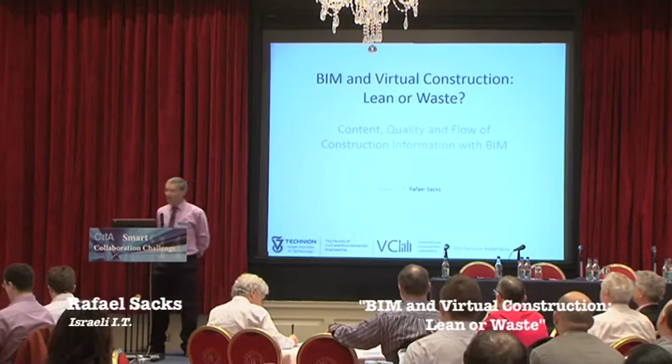I'm not an architect, but a civil engineer, structural engineer by training and construction management by research and practice for years. So I'm going to talk about a lot more practical issues of building modeling, and in particular about the flow of information and how much the flow of information affects the way that people work on site and in contracting in general.

Perhaps just by way of quick introduction, we have a virtual construction lab where we do a certain amount of virtual reality work, but really when I say virtual construction in terms of research, it's that we're trying to research phenomena that happen in construction in the lab, not necessarily with virtual reality. Our two foci are lean construction and building modeling, and the synergies between those. We have a wide range of work and techniques in the lean construction world, and the same in building information modeling, and a lot of technology too.

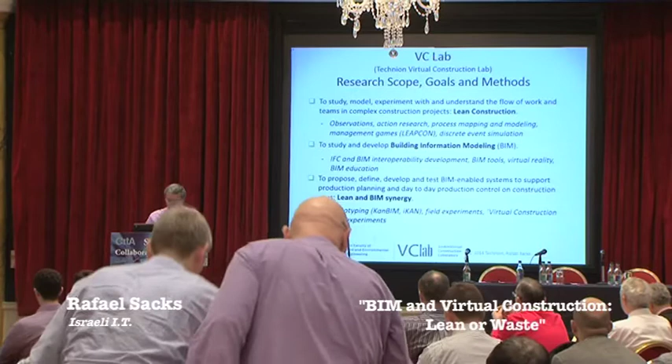But really, we've been putting a lot of effort in the last number of years into building prototypes for systems and then running field experiments and virtual experiments to try to sense what the impacts of information flows on construction sites will be.

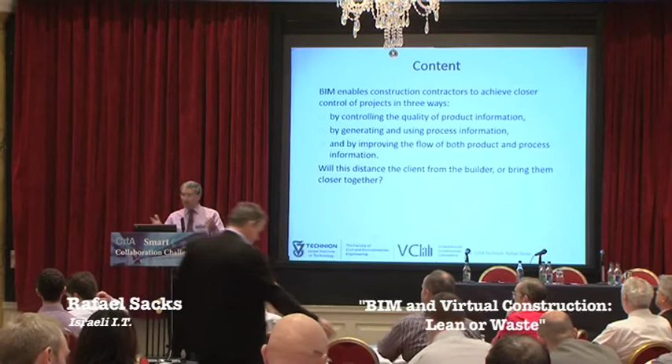So I'd like to address it in these three aspects: the product information, the information about the building; the process information, the information about what's happening, who is there, who is not there, where materials are, what's happening in the supply chains; and then to talk about how we can improve the flow of both of those on site to make things better. And the real question we want to ask is, will this distance the client from the builder or bring them closer together?

When I say client here, even the clients, of course, are a number of levels deep. So if we think about this simple situation where John Smith goes to build his house, and it's a simple job, and he has a builder, and the two communicate very directly. Where do you want the light switch? Oh, I'd like it here, and the builder or the electrician puts it there. The communication is direct, immediate, short-term, and presumably has fewer errors.

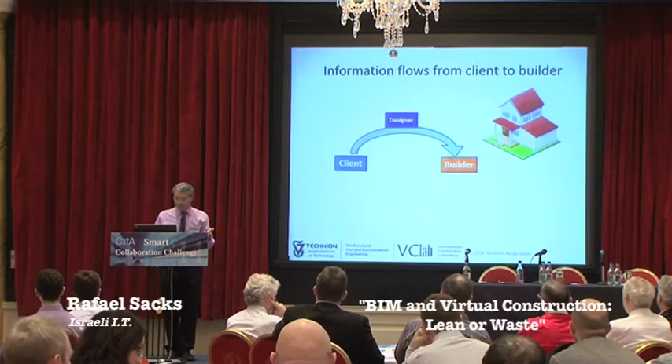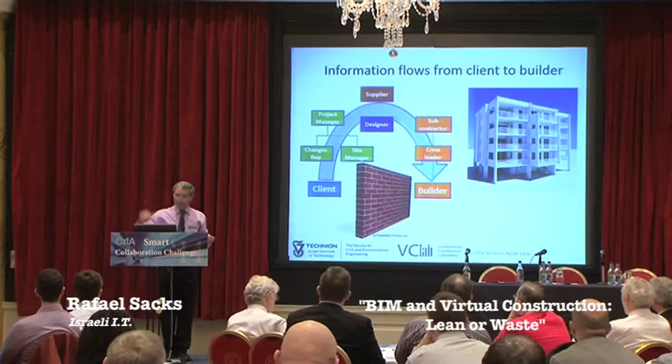But of course, in all the organizations that we're involved in, life is not like that. It's more like this, where the organizations are far more complex. There are different commercial relationships, business relationships, engineering relationships, design constraints, and so on. The same John Smith has bought an apartment in a big apartment development in a neighborhood, and needs to go through a number of different people in order to get that information to the builder. Oftentimes, the walls that we've built between those are such that the information gets through erroneously.

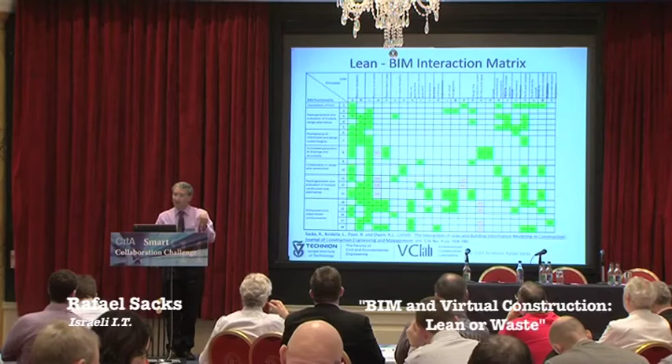So that's really what we're going to ask. The basic theoretical framework we're working from is this lean BIM interaction matrix, which we put together a number of years ago with my colleagues, Lauri Koskela and others at the time who were at Salford, where the column headings are lean principles, the rows are BIM functionalities, and we try to identify in the different cells, which are green, the different ways that these two ideas, or technology and principles, could interact positively.

So when you use BIM, does it make your construction leaner? You're doing something, and then you have the red cells, there are very few, which represent the opposite. You're doing something with BIM, like, for example, automatically producing drawings, and that tends to increase your tendency to make all the drawings at the end in a big batch, which is actually working against the flow of information through the life of a project. So there are also negative interactions.

So on the basis of this, we've continued and developed different prototypes, tools, and worked with companies. And we want to explore and investigate how many of these actually happen in practice.

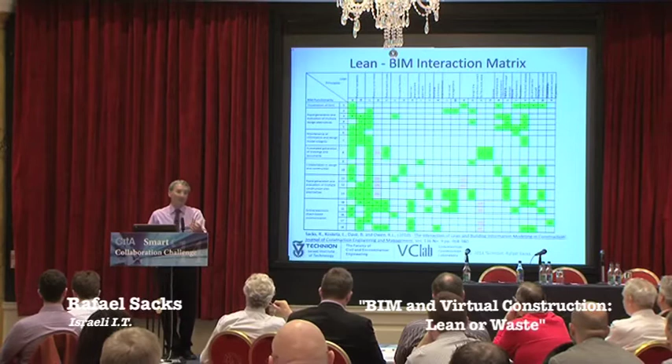So having set that background, let's talk about controlling the quality of product information. I can't cover the whole range of how we do this, but I'll pick simple examples to show you what I mean.

So we're talking about clash checking, construction detailing, virtual design and construction to avoid rework, and then pool detailing, prefabrication, and so on. I'm going to give a quick example about product information and talk about interoperability. So let's head into this.

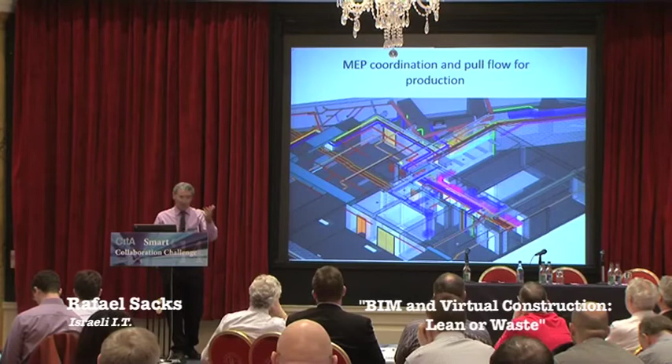Well, of course, the clash detection part of it, everybody's familiar with. It's clear from the teams and from the audience that this is a no-brainer. It's what Chuck likes to call, or Paul Teicholz likes to call, the low-hanging fruit. It's the first benefits we get.

But then we can talk about going from coordination to 2D, from 2D to BIM, from BIM to virtual design and construction, and then from VDC to pull flow, to lean flow. So what do we mean by these?

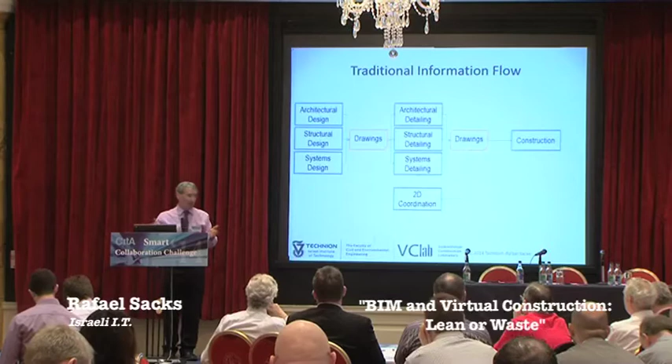Well, if you think about a traditional world 20 years ago, the world of CAD or of drawings, really what we did was we had some design, and then we produced some drawings. They went through to the contractor perhaps, or to somebody else to do detailing. They would produce more drawings, do 2D coordination on Chuck's light table, and then to construction. And of course, the construction had all of the problems that we're aware of.

Now we come along and we say, well, we can do building modeling, and we can do some 3D coordination. So we have a slightly different workflow where we take the initial drawings, model them, create the models, improve them, and then produce drawings and do the construction. Well, that's okay. That's still clash detection and so on.

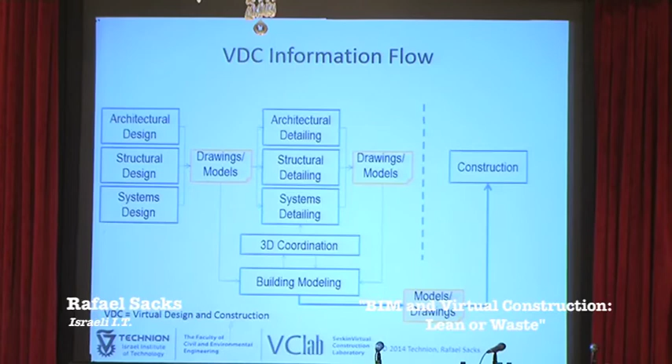But we can go a bit further than that, and do what is generally called virtual design and construction, where when we do the modeling, we're not doing it just to do the design, we're doing it to test how we're actually going to build the building. So in this case, we want the models to be built by the contractors. It's an exercise in prototyping, not only an exercise in design.

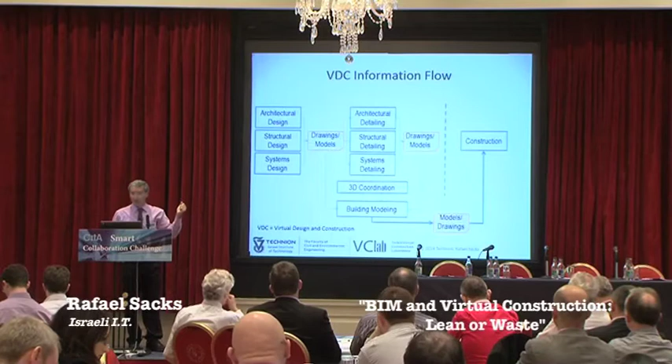And the most important thing we're doing here is we need to cut the flow of information from the drawings to the site and replace that, entirely rerouted through the model, so that we can get control of what happens on site from the model.

But of course, we'd like to take that yet another step, and this is something I've not seen done yet in real ways. In the lean paradigm, we don't want to do any work until it's both mature and required.

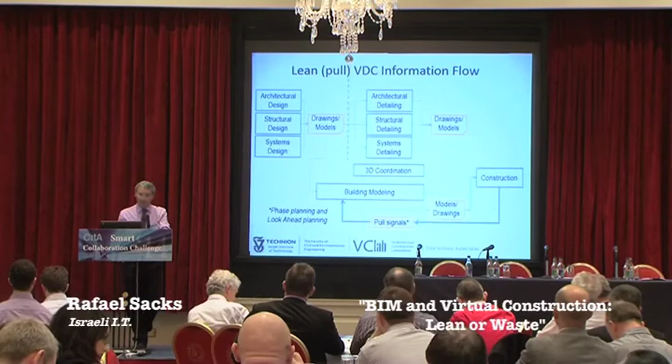So we really want to have the construction on site pulling the detailing. We're not going to detail any zones in the building, floors, areas, rooms, whatever, until we're ready to actually fabricate them and build them. Because if we do it ahead of time, we're building up inventory, we're building up batches, and we're setting ourselves up for rework. So these kind of pull signals coming back from the site through the chain, back to the modeler, back to the detailers, is where we want to go, so we can reduce cycle times as far as possible.

And then talking more about the product information, I'm going to move us to an area that we've all, I think, in the research areas been involved in for many, many years, at least 20 years, since IFC began and so on. And that is this challenge of interoperability.

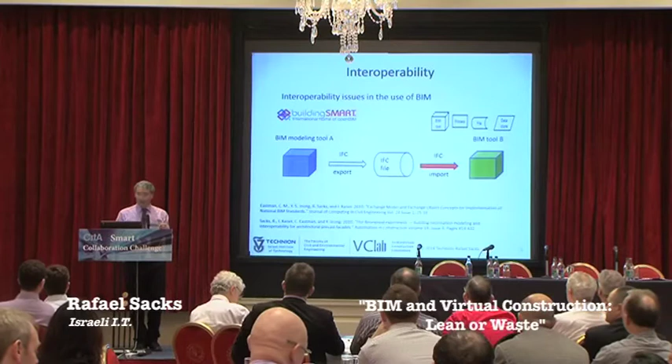How do I take models from tool A into tool B? And so, through the benefits of buildingSMART, we have the IFC, which is excellent as far as it goes. But still, as you see on the red arrow here, there are still problems. And I think any of you who've worked with IFC and with Exchange are aware of the kind of issues that we have.

So one thing that is improved is that we now have model view definitions that tailor the IFC export for particular needs, like in this case, the CV is the coordination view, and then we can import it into some other tool using that model view definition.

And we can do that over and over again, and the United States National BIM Standard defines a process by which we define model view definitions, but we define them for different domains.

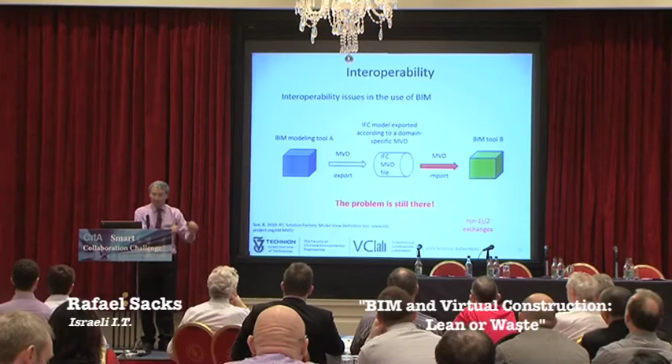In fact, it's a pleasure having Manu Venugopal here from Autodesk, because Manu previously was a PhD student at Georgia Tech, and Chuck and I had a joint project where we developed one of these MVDs for the area of precast concrete construction, and Manu took part in that.

A lot of work, very intensive, very highly detailed, and the problem is that in the end, if we need to have model view definitions for every domain, we get back to the original problem where we have n times n minus one over two exchanges to prepare if we're actually to make this happen. Now, the problem is a little bit ameliorated because we can encapsulate them and have what we call semantic exchange concepts. True, but nevertheless, we're still doing a lot more work.

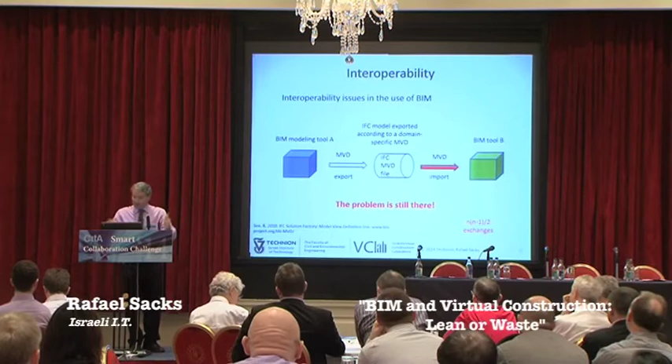So one of the ideas we've come along with is that we need to change that product information in the following way.

We need to put the onus for the semantic content on the importer rather than on the exporter, because the importer knows exactly what they need. The writer or author of the importing software knows what the internal data structure is. They know what they want to get in terms of concepts.

And if I show you this model, what do you see? It's a Tekla model. What is it? It's a car park built from precast. And these things on the top, the slab elements, they're precast double T's with an in-situ topping. So you can immediately see - I didn't tell you that's an IFC object that has the material precast and so on. We're all trained as professionals to see what we see.

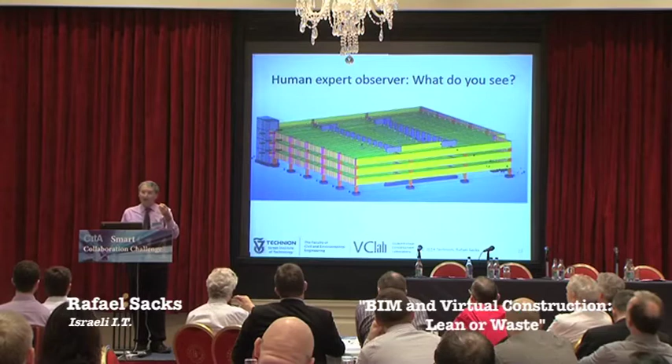So the question becomes this: whatever is in that IFC or Tekla model, it's being modeled by someone in some particular way for their own needs, in their own tool. But when they export it, there is much more implicit information there than explicit. Of course, there's a great deal of explicit information, but it's not complete.

If I wanted to do energy analysis or cost analysis of this, it would require a lot of work for me to filter that. In fact, Living FM spent a whole week trying to figure out how to do this for FM. You need to take those models and add to them a great deal of semantic meaning before you can use it for facilities.

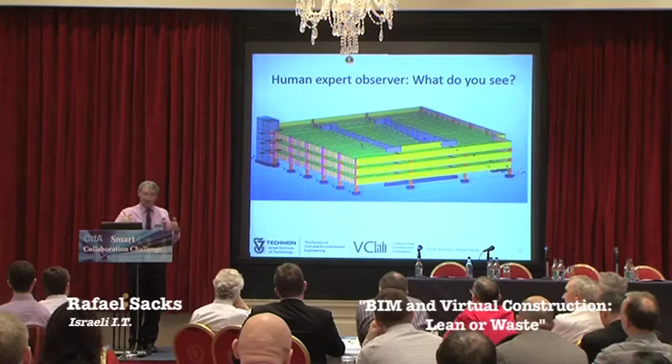So the idea says this: let's take these models, let's try to create an engine that can capture the knowledge of experts and then interpret what we're seeing and add it to the model for whatever purpose we want to add it for.

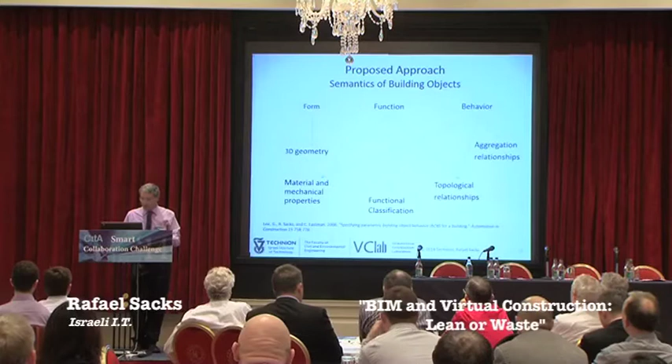And we rely on the fact that these models express the form and the function and behavior of the objects that they show, with various relationships between objects.

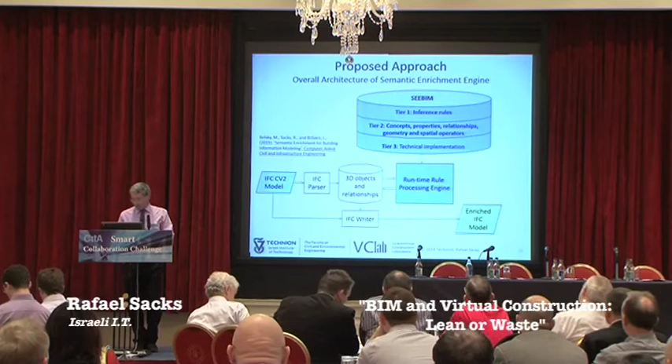So we say this: can we build a tool that we call SEEBIM? SEEBIM stands for Semantic Enrichment Engine for BIM. And the idea, I'll show you briefly, is that we create a set of inference rules that you see here - I have a pointer - and they get processed by the runtime rule processing engine to try to enrich the model.

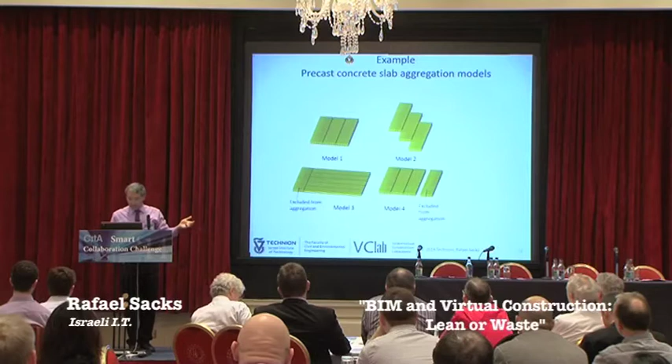So you can then say, okay, the receiving software that knows about precast needs to have this IFC structure - those beams need to be aggregated as a slab.

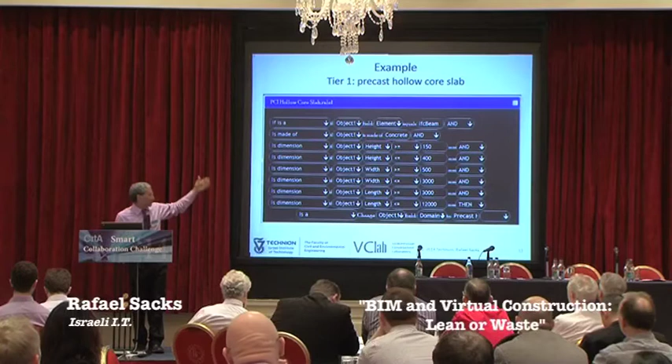And so we put together a prototype software, we call it SEEBIM, and within the interface you can create rules - like if the object is a beam element and it's made of concrete and it conforms to some size constraints, and perhaps if some object is adjacent to some other object along their long face - whatever rules I could glean from an engineer, we can implement. Then we run it through, and what we get is the same IFC model, but this time it's been enriched with all the aggregations, all the connections, all the joints, all the different things that a precast engineer would like to have in that model.

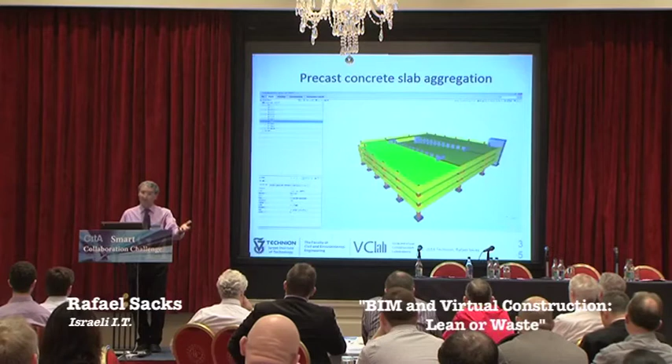We've tested this for a number of different domains, and one interesting one is exactly this issue of cost estimation. So you take a model like this, and the question that was raised—this was done by a PhD student of mine and a PhD student at Georgia Tech, named Shiva Aram—so you look at these columns, and the precast engineer would say, well, I can't fabricate or manufacture a column of 6 stories.

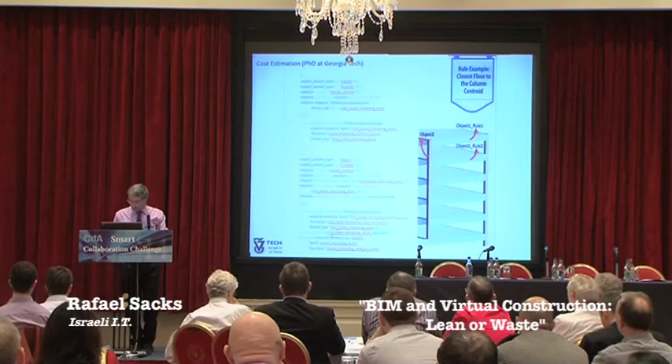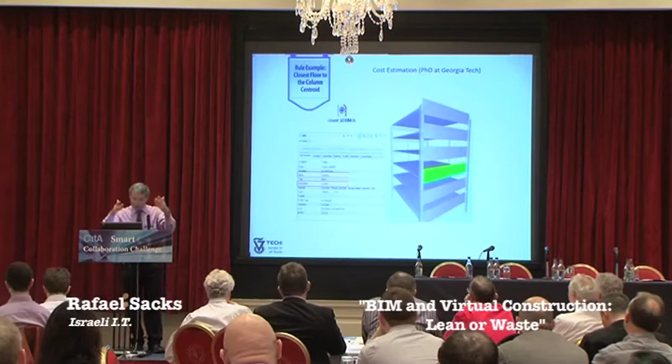I can make one of 3 stories. Where should I make the break? Well, I should make the break behind the spandrel that's closest to the center of the column in its height. So you write the appropriate rules, and you can do it. You say the right spandrel is the one that's half height of the building, and so on—a series of rules, and the spandrel is the closest to the center. And there you can now break the column for casting.

Another thing that we're trying to do now, and this is a proposal we have before the European Union, is to do the same thing for bridges. So we can do laser scanning. We've heard a great deal about laser scanning. What we want to do is to be able to take the laser scan, get the 3D objects, but then even after we have the 3D objects, we'd like to not just classify that as a beam, but also be able to say that there are connections, what material it's made of, how it was made, and so on for that bridge.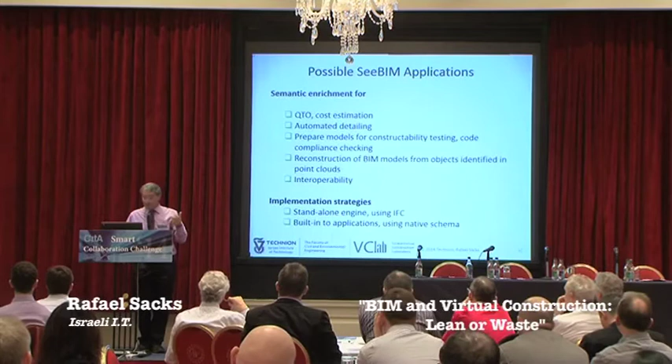And so there can be a very wide range of applications. We're beginning to see that we will be able to enrich models in such ways that we can have a wide variety of uses for them, and that we can perhaps begin to overcome the interoperability problem also in this way.

Well, let's talk for a moment about the process information. So in the process information, especially in the lean construction world, we're very much concerned with production planning, with workflow, with waste along the workflow. And so let's look at these—again, simple examples.

There's the notion of the 4D CAD. Well, 4D CAD can become much more powerful when we apply it to standardizing production. So here we have a building where we can model out all of the formwork for concrete pours. And in a building like this, it's built—this is a typical project that we've worked with.

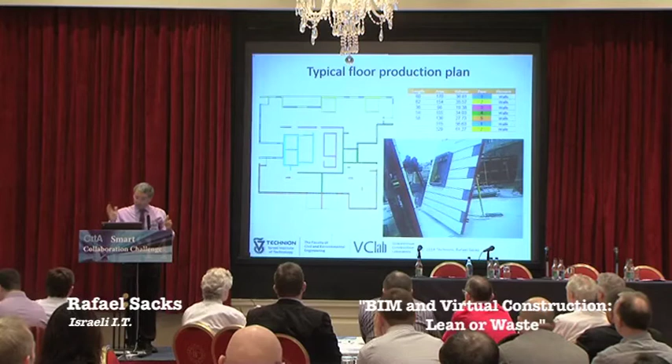The formwork for the walls, for the exterior walls—the stonework is prepared on the ground, the stone cladding is tied to the form and so on, and the forms are lifted up and cast and then brought back down. So the sequence in which you use the forms and rotate them through the floor is critical to getting a good workflow.

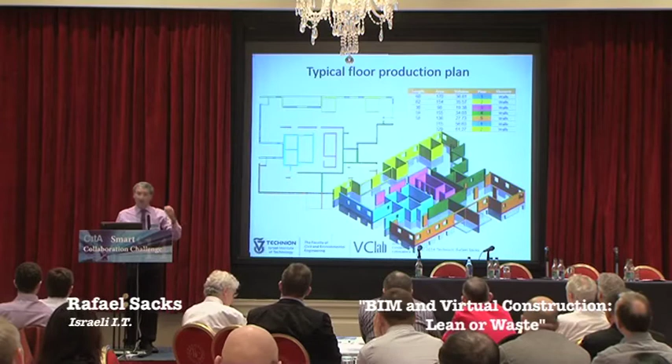So the company we've been working with have been doing this, and then they've brought this down to a fine art of being able to get the precise sequence, particularly here, where there are mirror-imaged buildings, and the formwork has to serve both buildings so that they're not purchasing or fabricating too much formwork. And they've been able to do that very effectively.

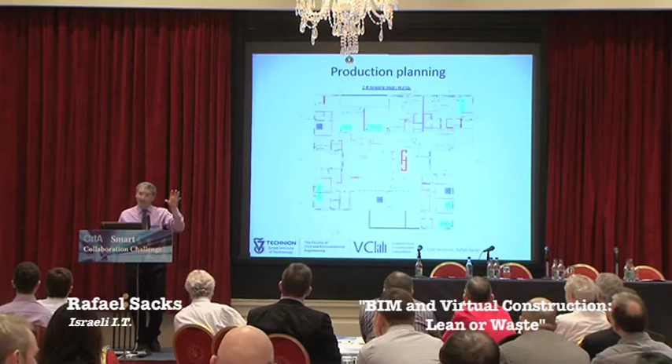Another thing they've been able to do—once the structure of a building is complete, it's very difficult to use the tower crane to bring finishing materials into the floors. So they have devised the idea of bringing the materials into the floor before the floors are cast. So they'll use the cranes at night to bring in all these pallets, as you see here.

So again, BIM has allowed them not only to detail out all the masonry work to figure out how much they need, but also to place them correctly so it's not going to interfere with the shoring. And the result is an enormous saving in terms of maneuvering or delivery of materials into the project afterwards.

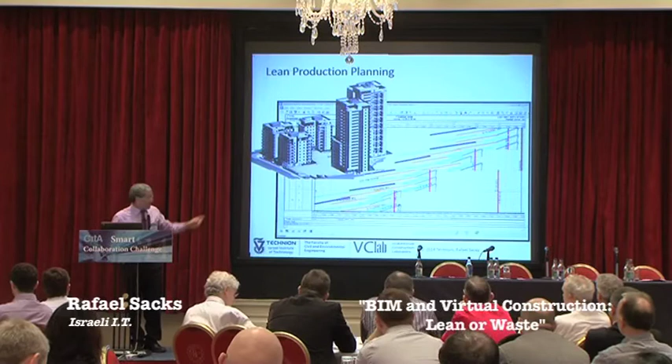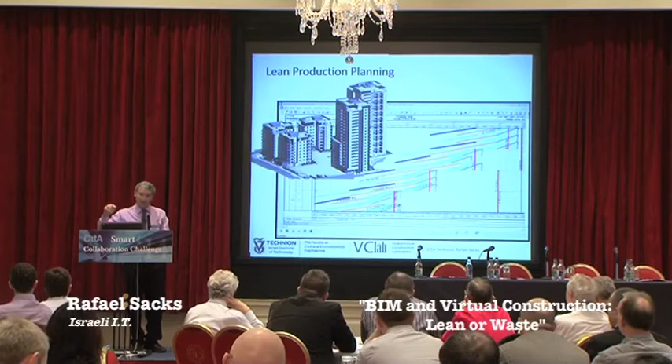Well, we know that we want to have good workflow. Good workflow is less waste, but how do you know? You have a project running, and you get a line of balance chart, made like that. Well, which of these have the best workflow? I'll show you again—the lines represent the work of a crew on a particular floor that's listed here on the left.

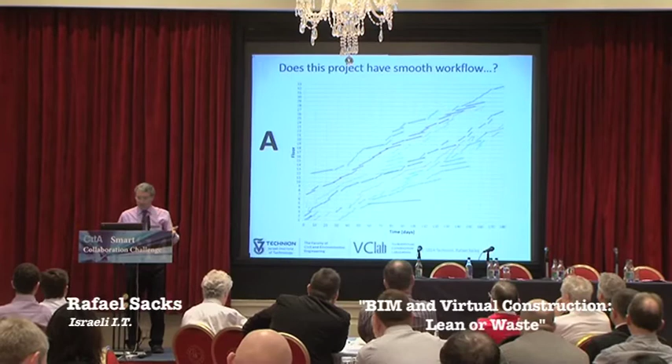For those who are less familiar, a continuous line is a good line. Breaks in the lines, like here, represent places where crews are waiting. If they're working here parallel, it means they're working in more than one place at a time, also not good. There are a number of features of these things that we can immediately identify as good or bad.

But we would like to be able to measure that. We'd like to be able to measure the performance of construction managers on site - are they achieving good workflow, or are they not achieving good workflow? It immediately impacts their budget and time.

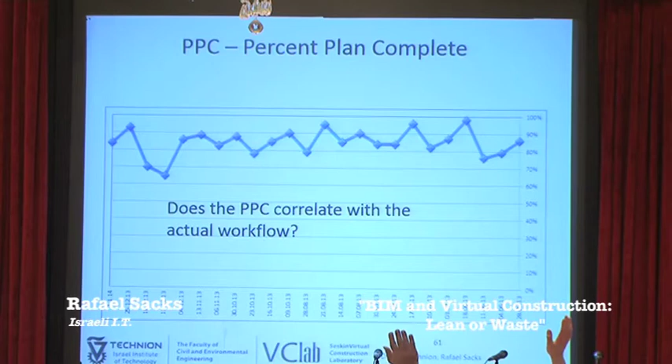So in the lean community, how many are involved in the lean community of practice or have some background in lean? Okay, so you've all heard of the percent plan complete, and that's the major index used in the framework of the last planner system, but the truth is, it does not measure workflow at all.

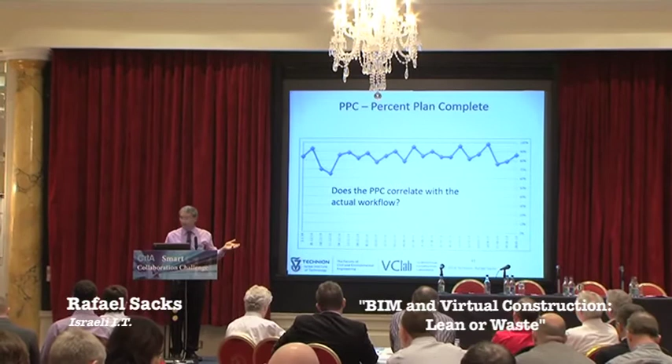So in different research, we have developed this lean workflow index, which depends on these different parameters: the standard deviation, the production rate, breaks between activities, the times the crews are working, the amount of work in progress, work out of sequence, space out of sequence, and so on. When you compile all those and consult a forum of experts about the weights to be applied to each of them, we're then able to provide a lean workflow index.

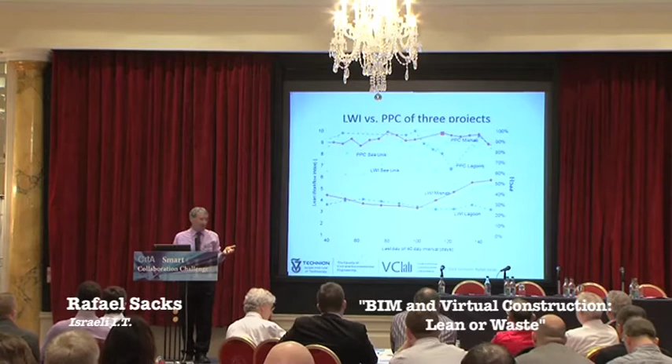And as you can see, if you compare the red to the red or the blue to the blue, the lines at the top are PPC measures from projects. The other lines are lean workflow index. They actually don't correlate, so PPC is not a very good measure of the workflow that you're achieving.

And we can do this now in a 2-week cycle so that it's a real-time measure. Management can say to project managers, we demand that you achieve at least 5. If you're not achieving 5, check what you're doing in a production system because it's not working well enough.

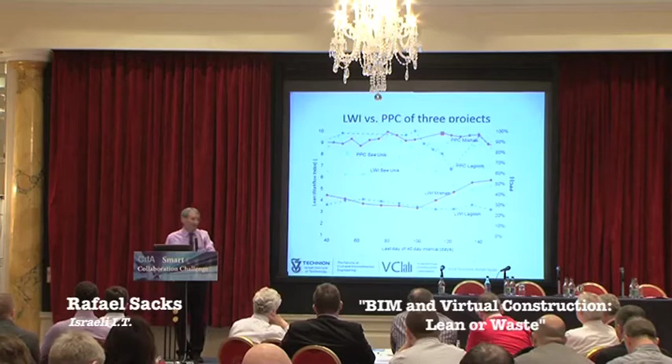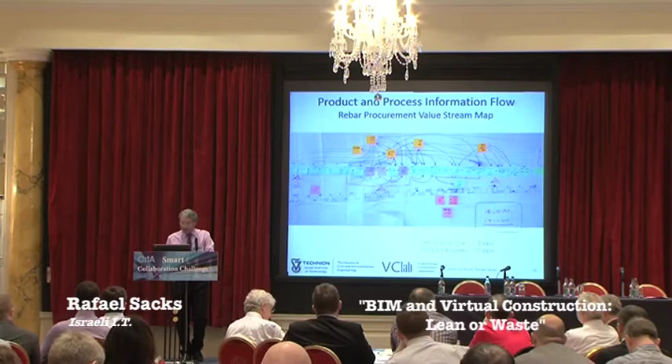Okay, and finally I'll talk about how we bring these perhaps together a little bit. Well, this is a very typical VSM, value stream map, in this case of rebar procurement done by a construction company. And the part I want to emphasize here is this: it's about rebar, how you do the detailing, send it to the fabricators, get it back, tie it in place in the pour.

Net working time is 8 days, but the gross time that it passed is 30 days. So it means that their cycle time for ordering rebar and getting it into the site is 30 days, when actually that could be done in 8 days. There are areas in construction, many of these areas, where the amount of savings are much bigger than we tend to think of. If we ask those rebar tiers to work a little bit quicker, or give them overtime or something, maybe they could work 5% faster for a few days. But these potentials are much, much higher.

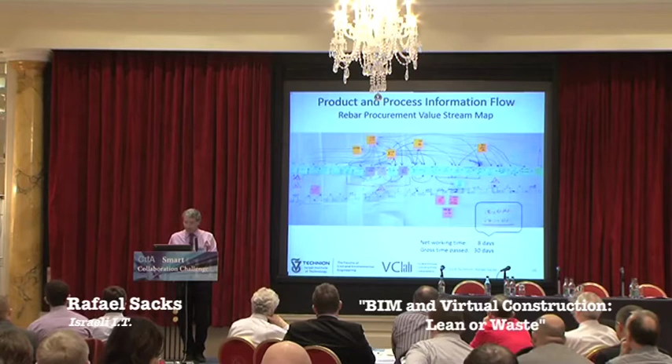So when we think of lean or traditional construction, oftentimes we have this make-ready process, but it's very short, not done very well. And then we do a lot of make-do, because we get to the site and we're trying to do some work, and the material hasn't arrived, and we've got the wrong materials, or the drawing's not up to date, and so forth, so we improvise.

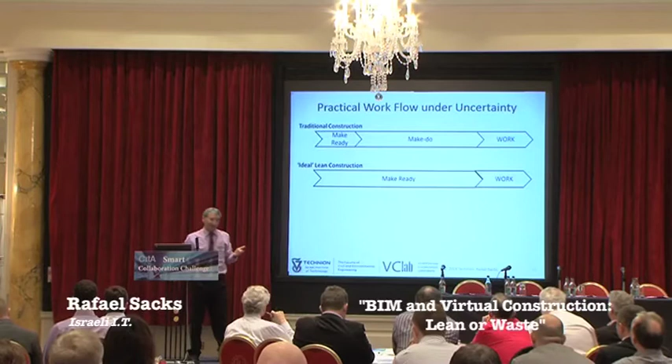The ideal in lean is the opposite. It's to say invest a lot of time in the making ready, in the preparation, so that you can then work first time correctly, as we heard from Mercury and DIT - that is the goal, the nirvana.

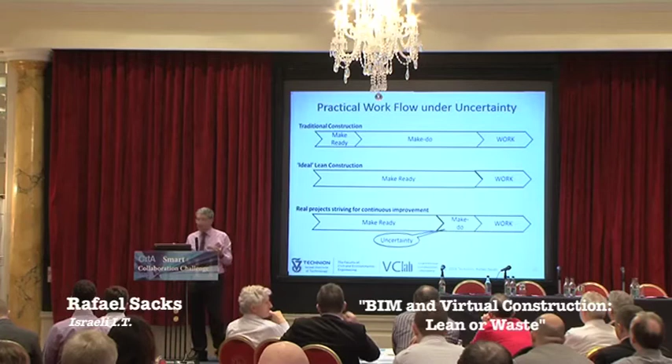But in the real world, even if we understand lean and we try, we can't really achieve that. We remain in the construction world with a degree of uncertainty. And it's here that we can begin making a difference with information, because the more we can reduce that uncertainty about the process, the better our production systems will be with less waste. And so we can map out the decision making.

All I wanted to show here is that whether we like it or not, construction crews, when they're on site, they reach these, what we call go, no-go decisions, where they reach a point and something doesn't fit. Do they abandon that work?

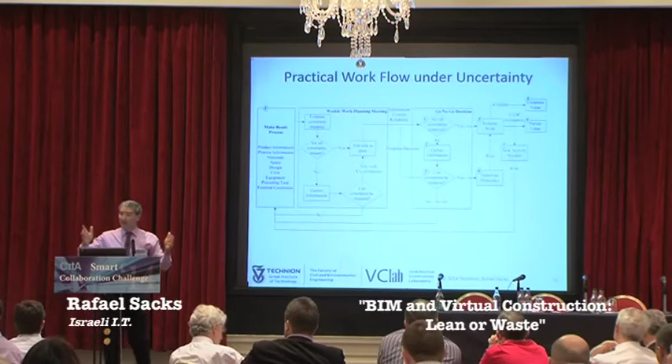Do they go somewhere else? Do they improvise? Do they do something else?

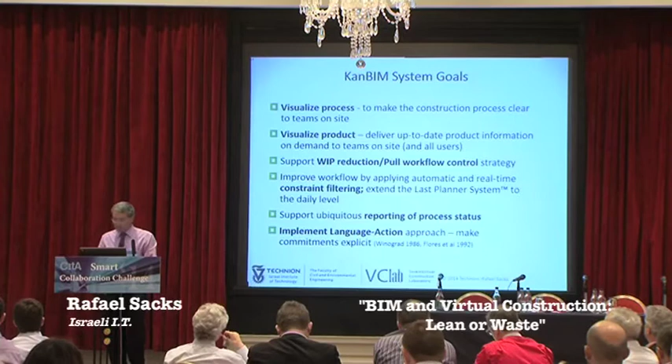To try to address this, the first prototype we built something like 6 years ago, we called KanBIM, which is Kanban and lean pull production, and BIM. What that tried to do was to visualize the process, the product, reduce WIP, filter constraints — in other words, the make-ready process — to report process status and implement this language-action sense of making commitments.

Part of the idea of using BIM as a platform for this was to say, if you want to teach people a new way of thinking, give them a tool which will allow them to work in a way which will then reveal to them a different way of thinking.

So the last planner system, which is one of the main tools used in lean construction, has this cascading planning paradigm. What we're doing here is adding a daily, an hourly, if you like, information system that updates on status and allows people to make commitments.

What this looks like is this — I'm going to just skip for a moment. We have the master planning, the phase planning, the weekly work planning, and the workflow control. If I just focus for a moment only on the weekly production control, then in these prototypes, you might do planning in this way.

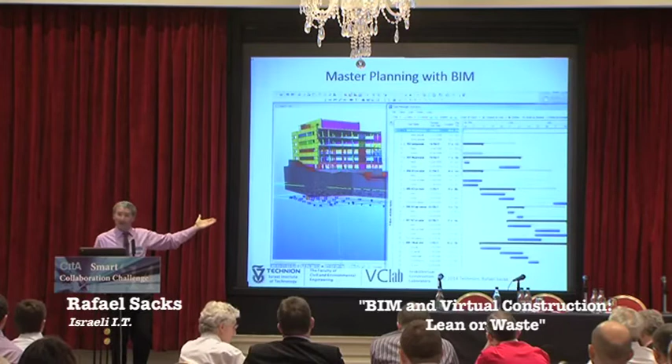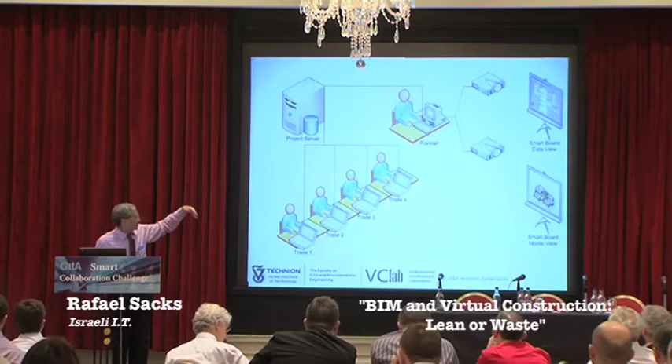You have the model, you create the activities and map them. And then you would have these weekly work planning meetings where the different trades are sitting around the same table with the planner, and they're looking at the model. What they're seeing on the model is a series of labels, and each label represents a task, an activity.

As you can see, some of the tasks have these green triangles, and some have red, and so on. What those represent is this idea of maturity — that a task to be done has to have materials, information, space, preceding work, safety, and so on. But all of those things might not be 100% ready, and if they're not, we run into problems.

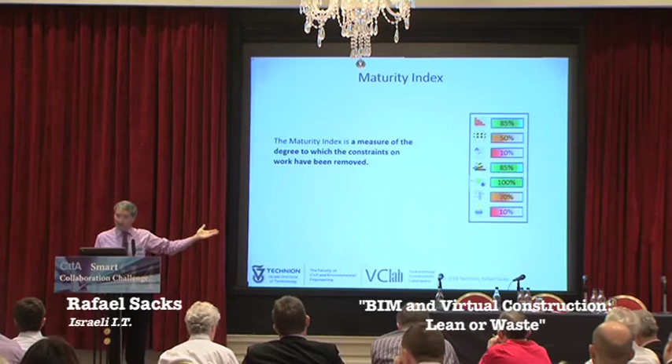So if we were able to track through ERP systems, through supply chains, and so on, the status of all of those make-ready issues, constraints, we could inform people about the status of activities, so that they don't begin activities which are not mature.

And the second index we can show them is a thing we call the pull flow index. What we mean here is, as I said, we want to keep work in progress as small as possible.

That means if I have 3 or 4 activities I can go and do in a week, different spaces in the building I might be able to work in, what I really want to do is choose the ones which allow follow-on work, and follow-on, and follow-on, and allow that space to be completed.

If I go and work in a space that's ready for me but not ready for the next activities because it's subject to design changes or some other hold, then I haven't added value. I haven't reduced the amount of work in the system, and that's a pity. My work has progressed, but I can't progress the project.

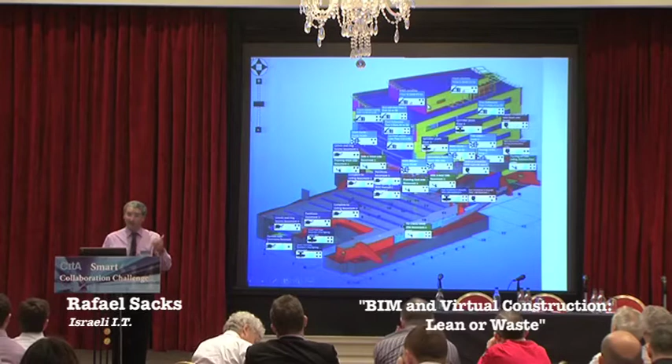So that's the second symbol that's showing up here in the star symbols. And the way it works in the planning is that each subcontractor makes their own plan for the coming week, perhaps in different areas of the building.

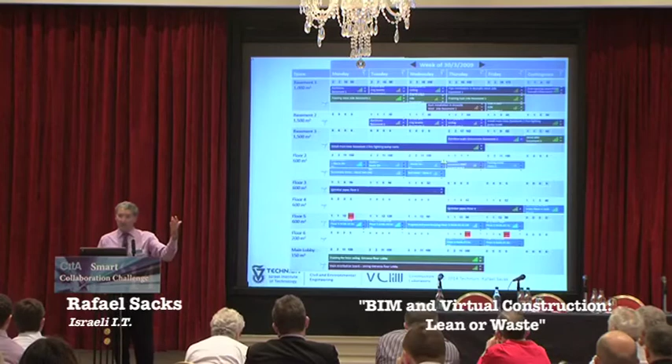You can see here, for example, in the main lobby, the gypsum team have decided to work there, and so has the electrician. So this is now put up straight up on the weekly work plan. The team together can then say, show me what that looks like.

Well, it's going to look like this. And now we can have a consultation, a very quick, fast consultation. Is that practical? Will the electrician be able to put in that electric board while

the scaffolding is there for the gypsum work? Perhaps not. If not, we need to reschedule. And that can be done in the weekly work planning.

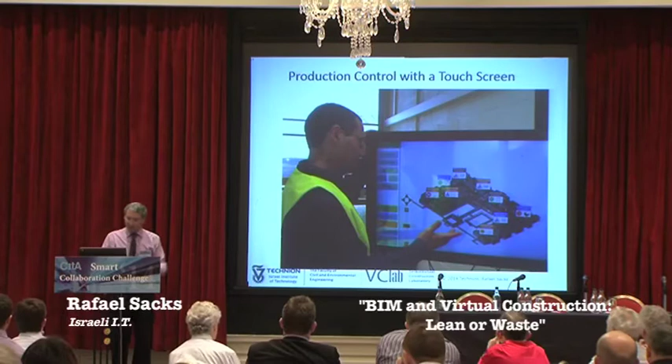So we had a prototype of this and tested it, worked out the workflows. The way it works is that people on the site can then report what their status is. They can say, I can start work, I report that I've started using my iPad or my smartphone or whatever, and then work in progress, and then it's stopped.

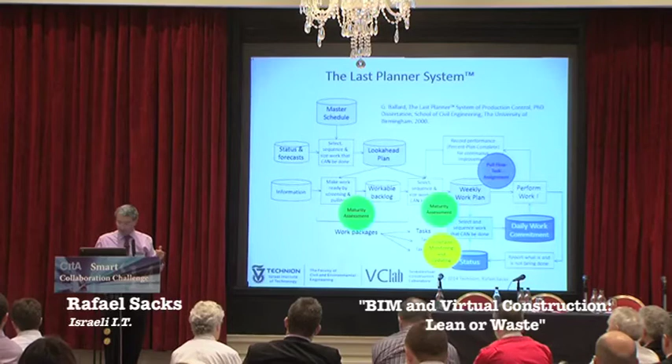If it's stopped, they'll call in help, and so forth. The benefit of doing that is that we get the information back into the system, which then becomes visible for everyone else. So in terms of the original last planner, we're adding maturity assessment, we're adding pull flow task assignment, and we're adding constraint monitoring and updating all the time.

We don't have time now, but on YouTube, if you look for the KanBIM keyword, you'll find a number of movies that show this in different experimental situations, on site and in our virtual construction site.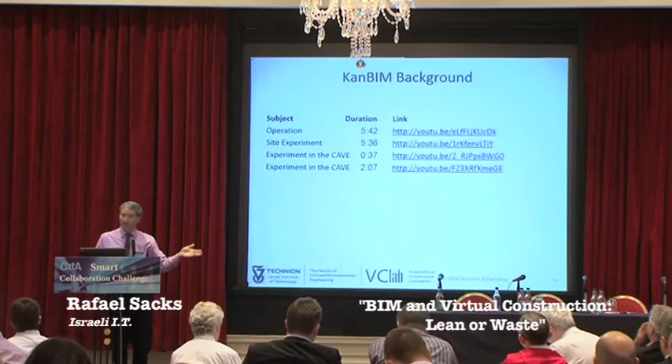And then, as the years have progressed, 2011, 12, and so on, we've started to see quite a proliferation of startup companies who are offering software that begins to do this. Vela, recently purchased by Autodesk.

BIM 360 and various applications, Smart Use, Advanced. Sablono is a German startup. Procore, and there's another one now called Stant, which is a Brazilian startup. All of these try to provide sharing of information.

They sit in the cloud, they use building modeling, they give process information and sorting and so on. But there are a number of features that, at least in our view, following this through in the research, are missing. The missing features are some of these.

In the experimental work, we found that the more subcontractors and trade crews use systems like that, the more familiar they become with the work in progress of others, and they begin to do social networking amongst themselves, which in itself provides coordination that improves production.

So many of them have asked us, can we use this at home? Can we have this sort of thing? So we thought of creating something called Sitebook instead of Facebook, where they could communicate among themselves and coordinate the project. They're very willing to collaborate, surprisingly willing to collaborate, because it improves their productivity.

Team development and collaboration, which I mentioned. Work planning - from a subcontractor's point of view, it's not enough to plan this project. They're working at the same time on multiple projects. They would like to be able to plan their resources across projects.

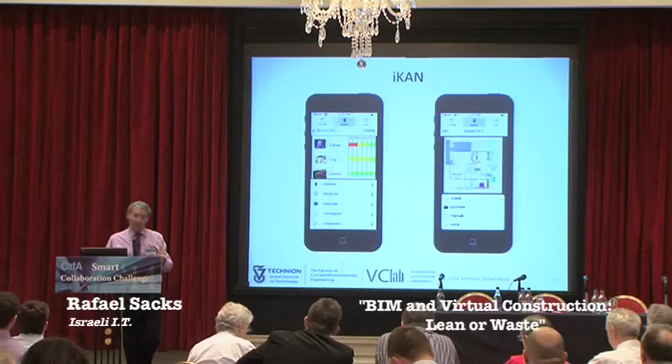Really what we're trying to do here is create online feedback of constraints, ubiquitous reporting of process status, and agile negotiation among subcontractors about the work to be done through the network.

But we have a lot of questions here, like how do we evaluate the effect of information flow? Can we measure the change in the impact it has? How can we evaluate the effect of the social networks that are generated? Do the social networks have more power than the technology, perhaps? And if so, can we engender social networks in other ways?

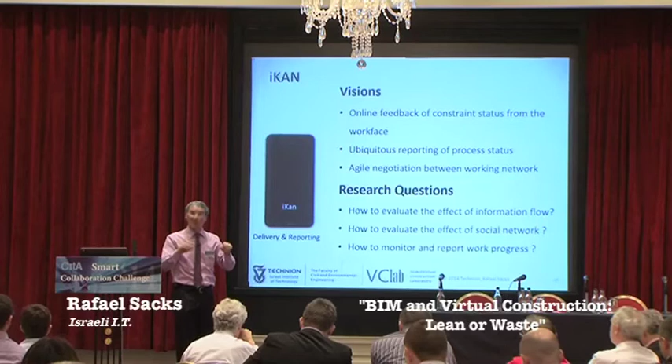I have another student who has been trying for a few years something we call the social subcontract, which takes its idea from Jean-Jacques Rousseau's social contract, where individuals give up some of their own personal freedoms and rights for the sake of belonging to a state, organization, or society, and then enjoy the win-win of stability that society provides them. By the same token, subcontractors in certain situations can give up some of their own freedoms and work in order to collaborate with others to create a win-win.

So then, I guess I'll wrap up and say that the question we began with was: will this distance the client from the builder, or will it bring them closer together?

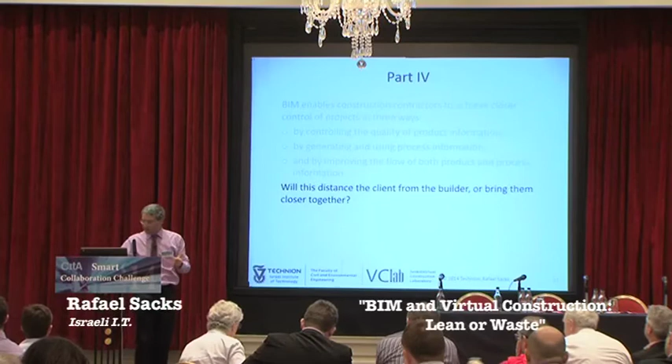And so we observe, and we've done a lot of work on this issue of client changes. And in this case, it's not just the principal client, but the apartment owners who have purchased apartments from the real estate developer who actually are working opposite the contractor. And this kind of statement is very common.

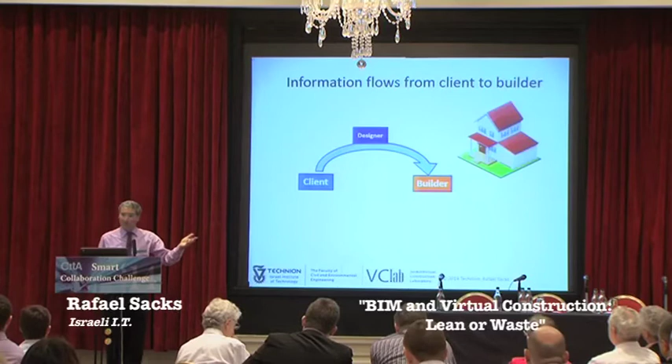So we began with this idea where I'm the apartment client and I have my own builder, and there's no problem with the flow of information from me to the builder. And the situation that we've created over time, that society has created, the construction industry, because of its fragmentation and all the other problems we're aware of. One of the companies we're working with has begun modeling thoroughly all of the individual apartments.

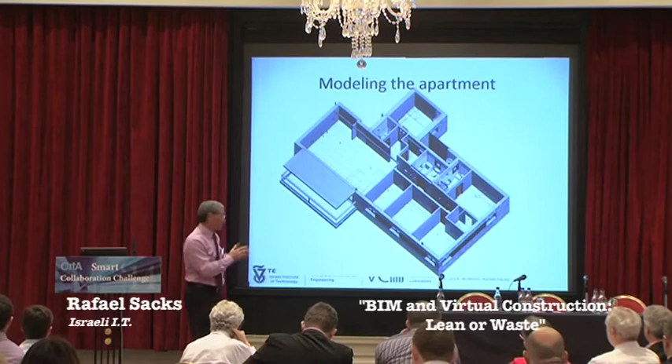These were done in a project that has 1,036 apartments. Every single one is modeled, even the typical apartments. The clients are brought to sit opposite the model, and all the changes are recorded directly in the model. Because that model is communicated directly to the workers on site, the electrician who needs to put in that outlet is looking at the same model that might have been updated yesterday by the client and is able to put it in place.

Now, I'm not saying that's as good as the client being there and pointing, but it's becoming a lot closer. So perhaps that flow of information can be far more direct and transparent than our very complex systems have made it up to now.

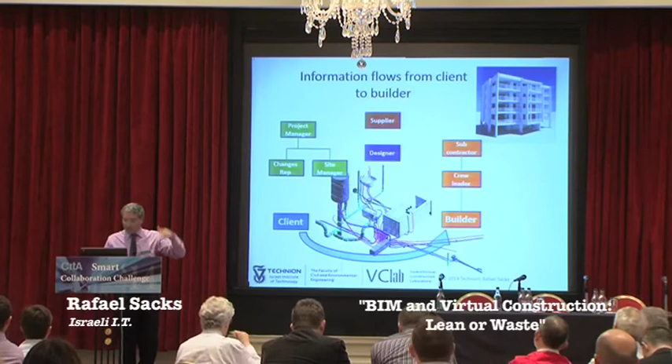So I'll conclude and ask, where do we stand in terms of that theoretical framework, the matrix I showed in the beginning? In this particular construction company that we've had a close research practice relationship with over 4 years now, they're already doing most of these things, and each one is one of those cells on the matrix. They're doing a number of others. So we are making progress, not just in the adoption of BIM, but in the synergistic adoption of BIM in terms of their lean goals.

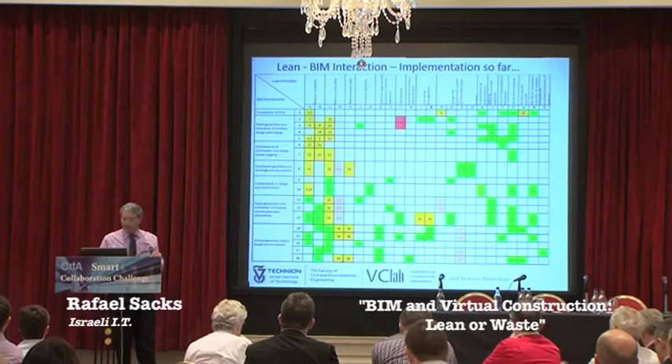If I go back to the matrix itself, there are 56 green cells. Of them, we've identified so far that about 25 are working. They've been implemented now, and the matrix has helped guide what they're doing to fulfill them. But there's still a lot of green potential, a lot of green field for us to exploit. Interestingly, there are also these 2 red cells up at the top — things we did not predict, but that turned out to be very synergistic. Perhaps there will be more as we go along.

And what's next? Alan, in his email a week or two ago, asked if I could address the future and what it means for the Irish construction industry and how government should be involved. Well, I think we're heading towards much more ubiquitous access to product and process information, including on the site.

We've seen all these startups. We know now that Autodesk has gotten deeply involved in this. A discussion earlier with the people at Asite made it clear that perhaps some of this can be implemented using Asite in terms of workflows and monitoring. I think we're going to see much deeper integration of ERP systems and supply chains, information systems with company-wide information — process control information, project management information.

Hopefully we'll also begin to see the detailing and supply of product information being pulled rather than pushed. We'll presumably see a lot more social networking among subcontractors. I don't know if any of you have seen this, but amongst subcontractors on unsophisticated construction sites, the most popular collaboration tool is WhatsApp — you can create a group, share photos, share texting, and it's very quick, very open, no overhead for setting up. In many cases, the GC won't even know it's happening on their site.

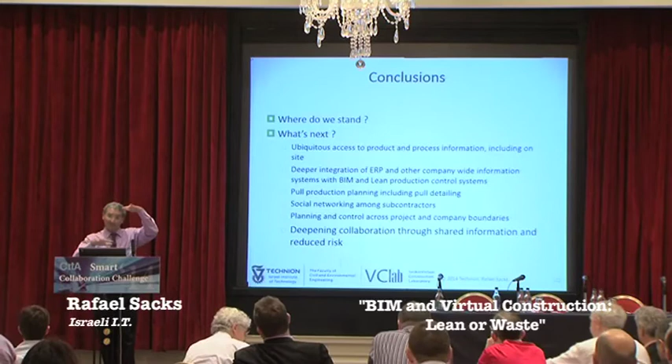Planning and control across project boundaries and across company boundaries is essential for subcontractors who are spread in a horizontal way across projects, rather than GCs who focus on vertical projects. If they're to get the benefits of the win-win, this becomes a key feature. So perhaps we could summarize all of those points by calling it much deeper collaboration through shared information and reduced risk.

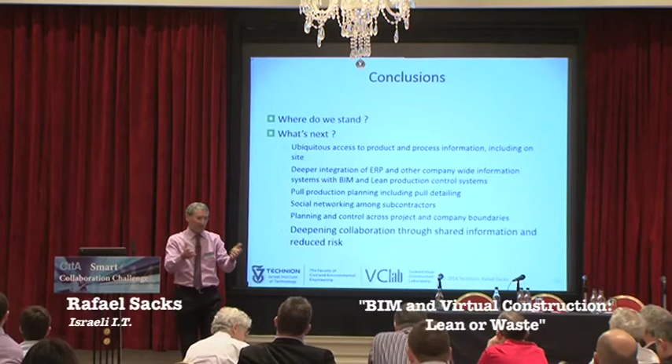And here I might conclude: there was a question asked earlier about how do you encourage collaboration, how do you get contractors to collaborate, what's the incentive? Well, part of it is to look at why they don't collaborate, and that has to do a great deal with risk and their sense of protecting themselves. There's a lot of game theory work, as we discussed before, where you can use economic game theory to show the prisoner's dilemma and development from there — when people lack information, their risk rises. When your risk rises, you behave more defensively. In our context, that means you're risk averse, and so you act in a way that reduces your risk but doesn't necessarily increase the benefit for others.

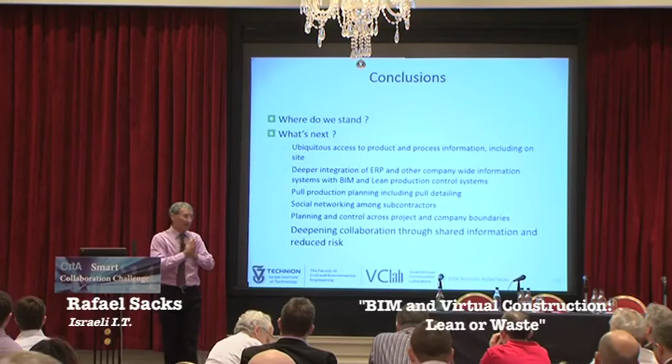When you have better information, what they're calling in game theory the information gap is reduced, you can then begin to behave less risk averse, more collaboratively, and we get what in game theory is called win-win situations. So perhaps more pervasive information, more transparency about what's going on at a construction site, or for that matter in a construction project beyond the site. What is the status of information, of drawings? What is the status of material deliveries? Will general contractors make all that more transparent to their teams of subcontractors?

The problem with that view is it works, it's fine, and it's at the root of critical path method and a lot of other methods of construction management. It's at the heart of bills of quantities and costing, because each line item is a product. But the problem with it is that it hides a lot of activity that goes on beyond just putting block on block. Those can be activities like delivering materials, creating the drawings, rework, a bricklayer waiting because the bricks didn't arrive, or the information was wrong, or the supply chain is not right, or the weather wasn't good, or the scaffold, whatever.

So it turns out, as I showed in the one example there, that most of the waste that goes on is hidden in the unit prices. When we focus only on those transformations, we don't see what goes on between them, the delivery, the waiting, and so on. So in Lean, Koskela did wonderful work where he explained that we can think of construction in a different way, called the flow view, and a third way called the value view. In the flow view, we think of construction as things flowing. Materials flow, labor crews flow, they move from place to place, and if we follow them, we can see that there are times when they're working and times when they're not working. We can have much bigger benefits in terms of increased productivity by reducing the non-working time than by focusing on how better we can lay the brick on the wall.

So we try to teach our students right from the get-go, in second, third year introductory courses to construction management, that there are three different ways of conceiving or thinking of construction production. Then we use different games, a range of games that we can use to show that waste, to show the impact of variability and instability. In graduate studies, we have courses that focus on lean construction, and it's a lot more about how you use the tools, how you realign production systems and so on, leading on to IPD and other more sophisticated topics. But I would emphasize that what we're trying to do is not to tell them this is some other way of doing things, that this is a good way of doing things, and that's how they should be as practitioners.